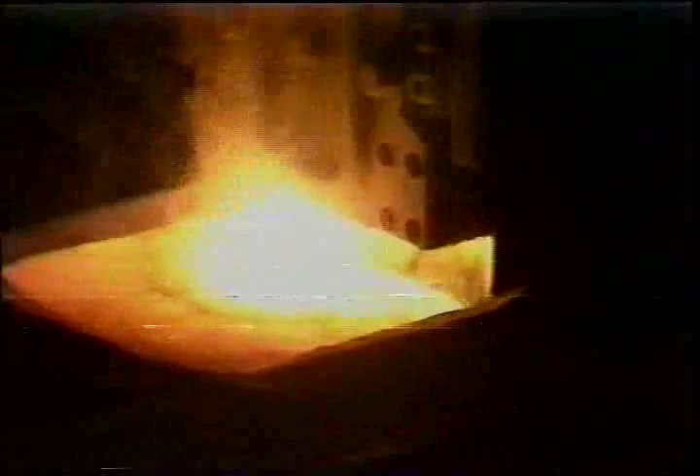High-temperature vessels, such as those used in nuclear power reactors or oil desulfurization towers, are usually lined with stainless steel, which excels in resistance against corrosion. And a new overlaying welding process has been developed. It is called the Maglay process.

It is a new overlaying welding process using a wide strip electrode and featured with adoption of electroslag welding and control of liquid slag and metal flow by electromagnetic force. The Maglay process promises higher quality welds and better productivity than the conventional arc welding method.

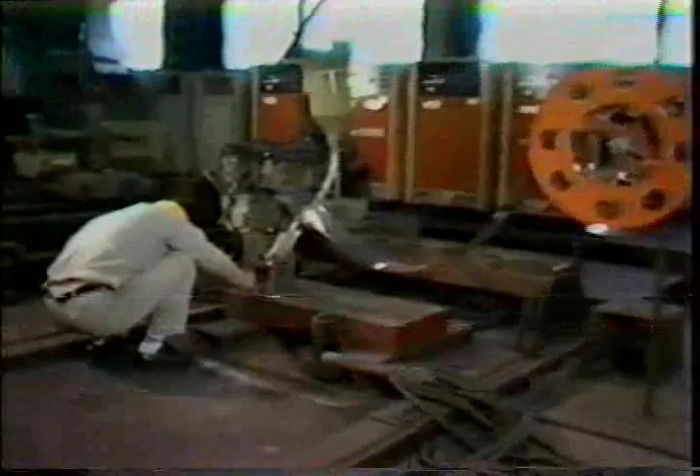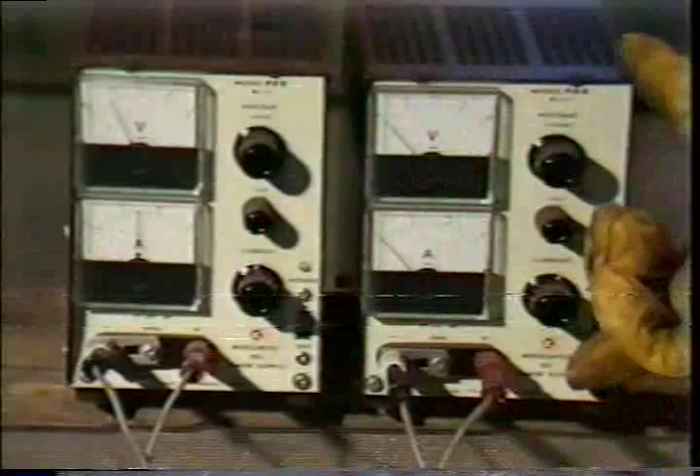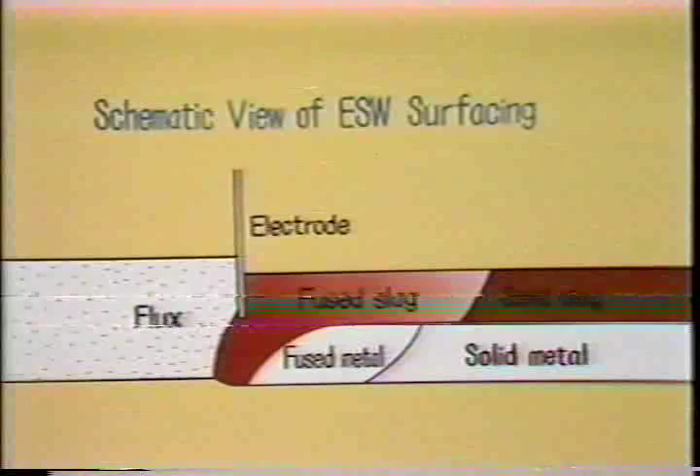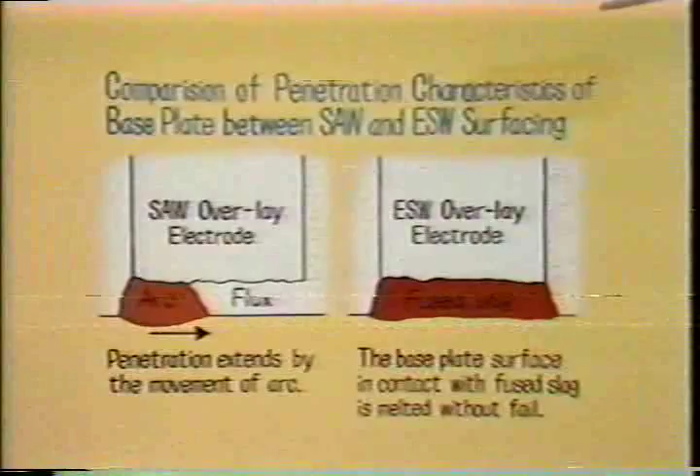How is the wide strip electrode overlaying welding done? Let us look into the details. As the figure shows, it utilizes heat of the molten slag generated by electric resistance. The ESW process shown on the right has better penetration characteristics of base plate than the conventional SAW, opening the way for use of 150 millimeters or wider electrodes without slag inclusions or lack of fusion.

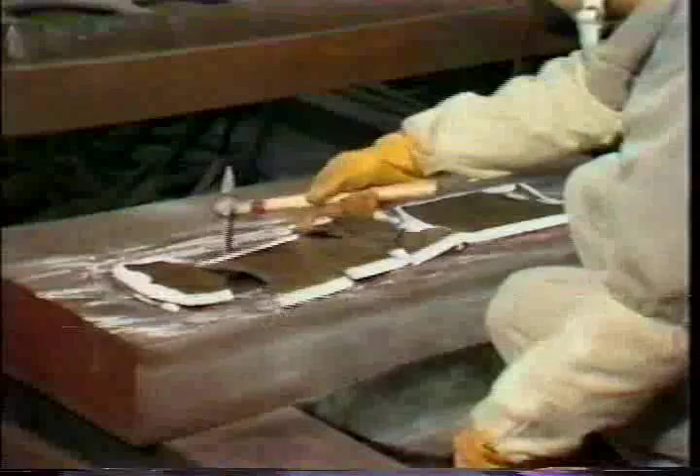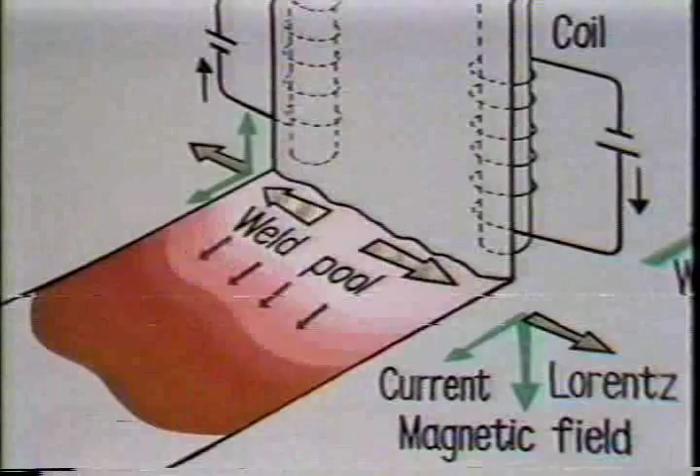What makes the Maglay process outstanding then? The epoch-making idea is the provision of electromagnetic coils on both frontal sides of the electrode, whose magnetic fields act on the welding current to prevent undercutting and flatten the weld bead.

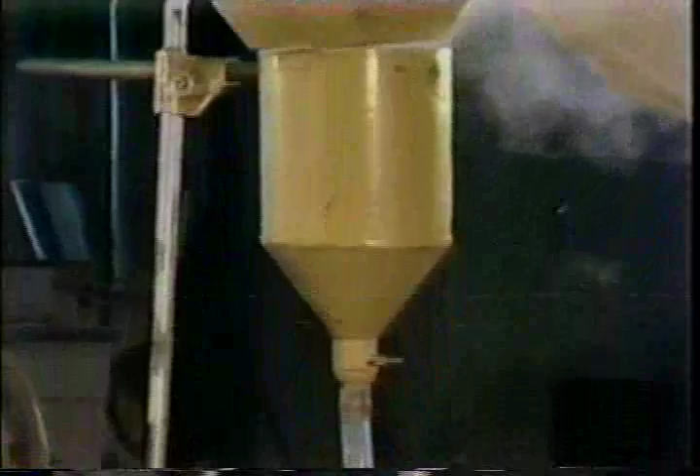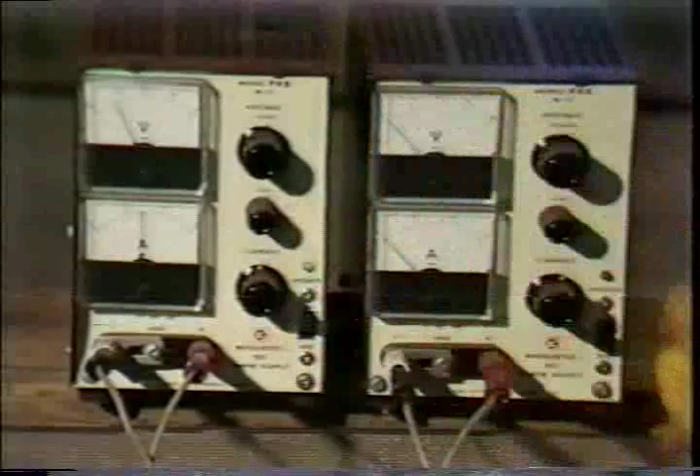Now let's see an actual application of the Maglay process. A conventional SAW strip electrode welder can be turned into the new system by a simple improvement on its contact jaw for attaching the lateral coils. Magnetic control is started by exciting the coils. The electrode now in use is 150 millimeters wide.

Watch the flow of the weld pool, and this is the secret of the excellent performance of the Maglay process. The flow of the weld pool is clearly seen from the surface pattern of the welding bead. Now, what will happen if the coil on the right is to remain idle? As you can see, molten slag flows anti-clockwise. The undercutting on the right side shows how effectively the magnetic control had been working.

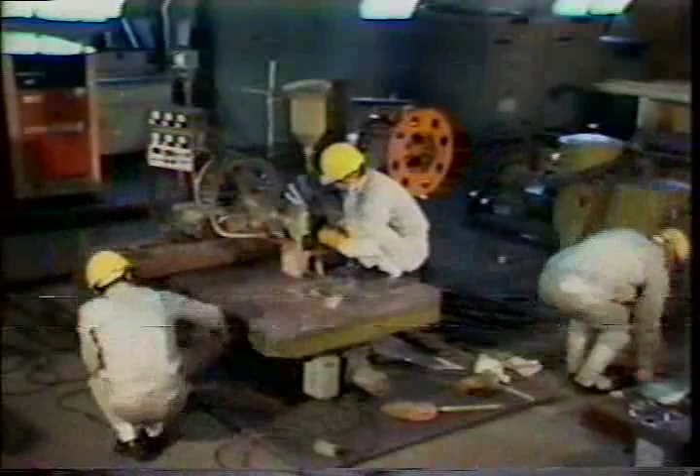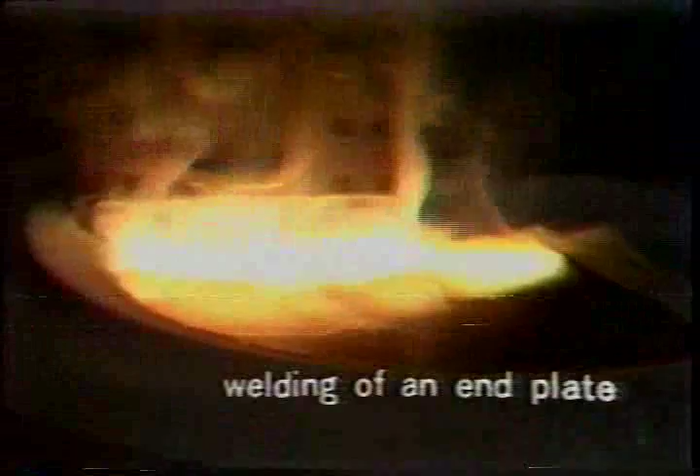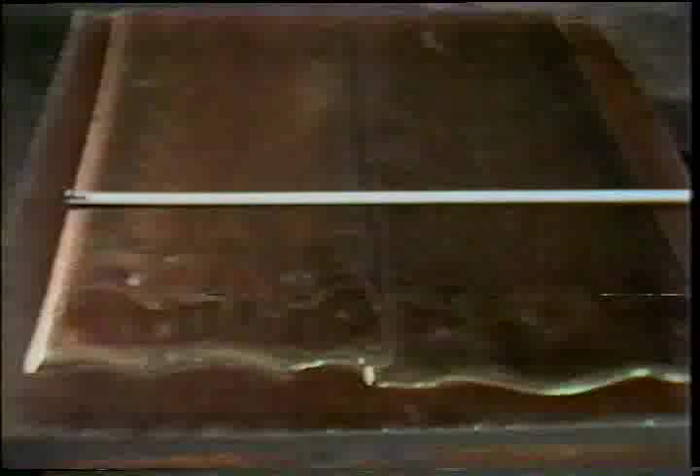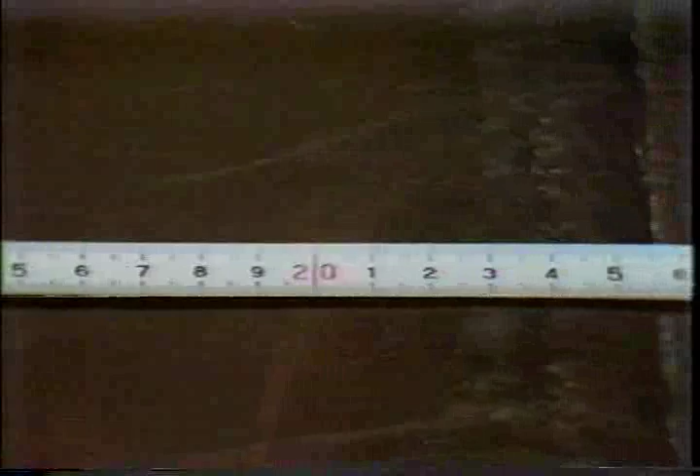Next, an end plate welding is demonstrated. In the meantime, let us take another look at the merits of the Maglay process. Welding efficiency has drastically been raised through application of wider electrodes, not only 150 millimeter wide ones, but even those as wide as 250 or 300 millimeters. Here are examples of electrodes ranging in width from 25 to 250 millimeters. The electrode thickness is 0.4 millimeter.

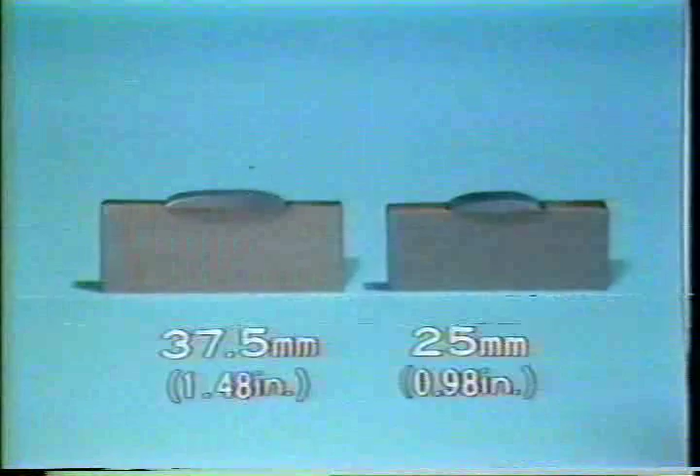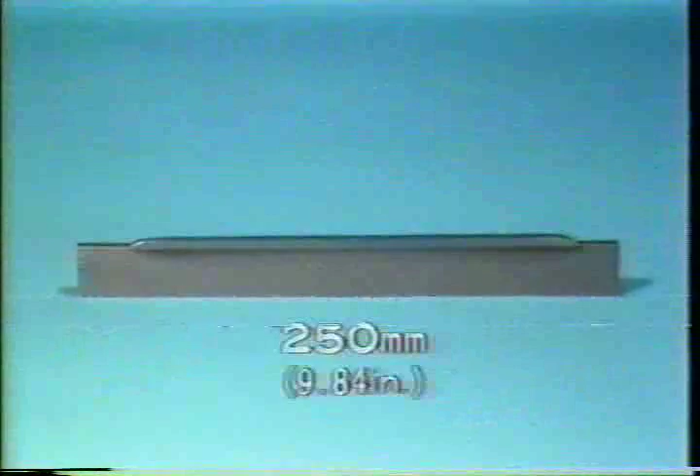The bead thickness can be adjusted between 3 and 6 millimeters, depending on the welding condition. Look at the beautiful overlapping area between two passes of 150 millimeter wide welding. Welding by the Maglay process has no slag inclusions or lack of fusion. Bead dilution by base metal is on a low level. That is, the weld is little affected by the base metal.

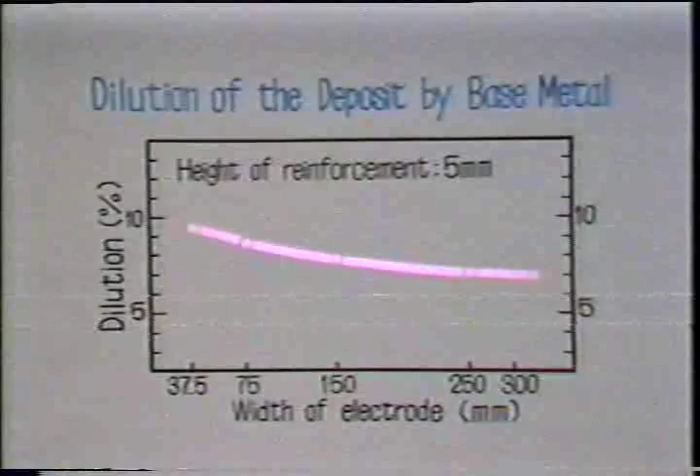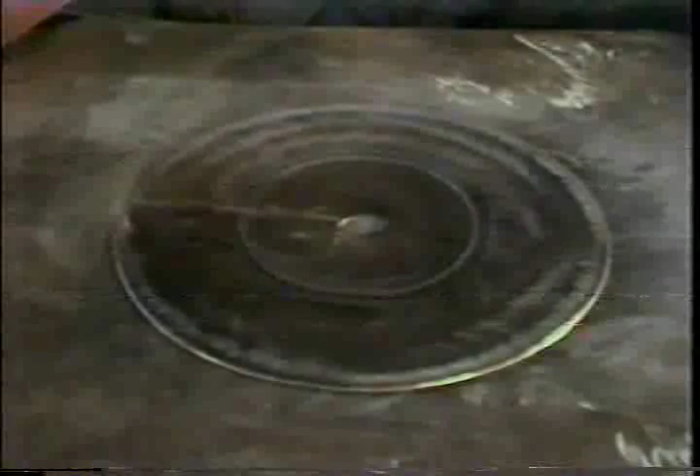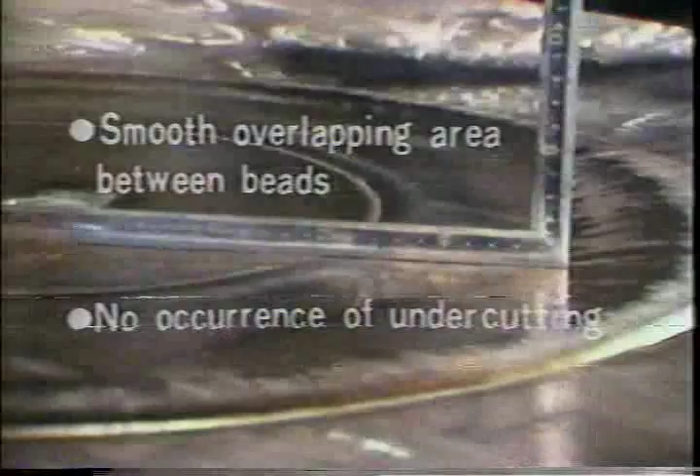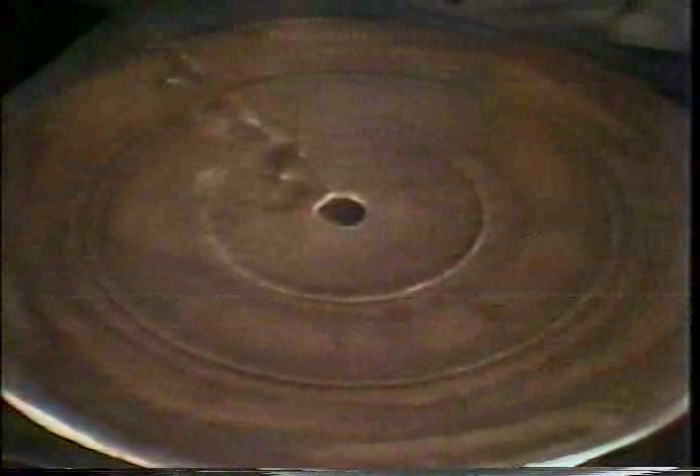The smooth overlapping area between the welding beads causes no undercutting. Hence, the Maglay process promises a drastic reduction in repair welding and economy of materials, time and labor. Also, the welding beads have superior anti-corrosiveness due to their low oxide contents. In this way, highly efficient and reliable welding has been made possible by the Maglay process.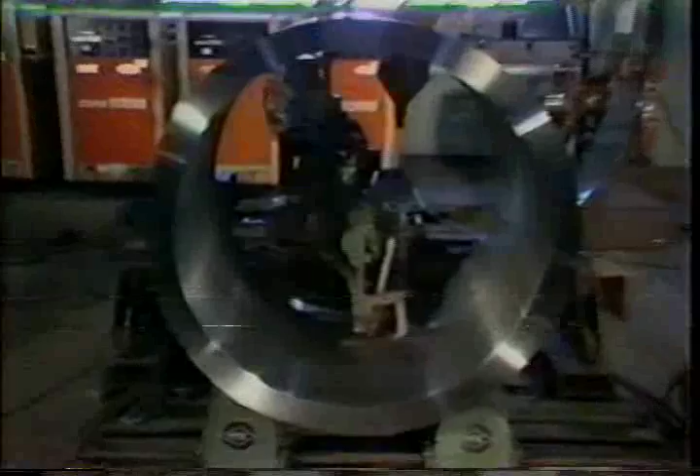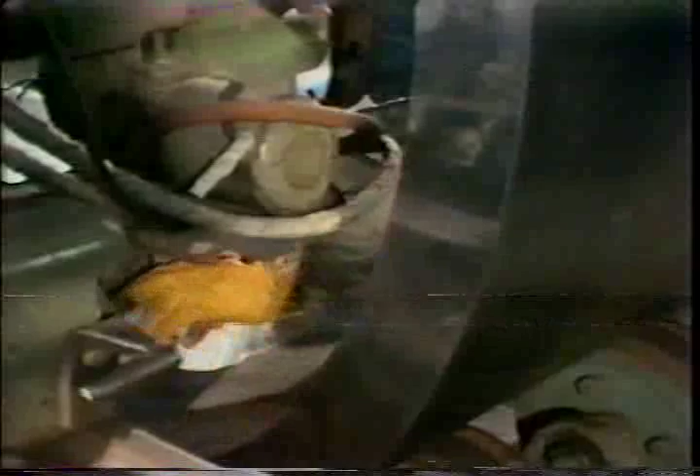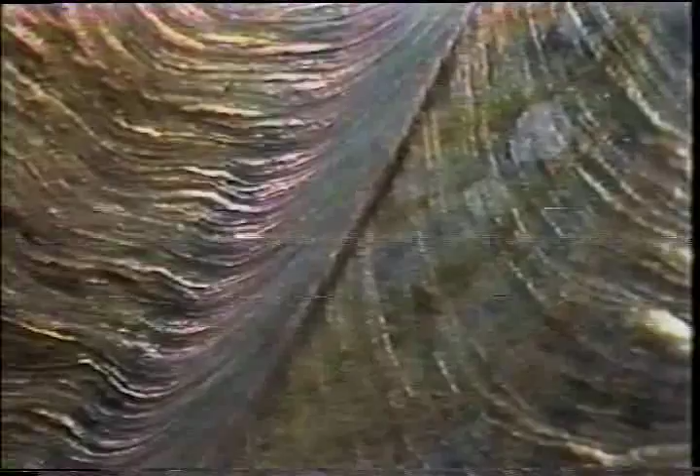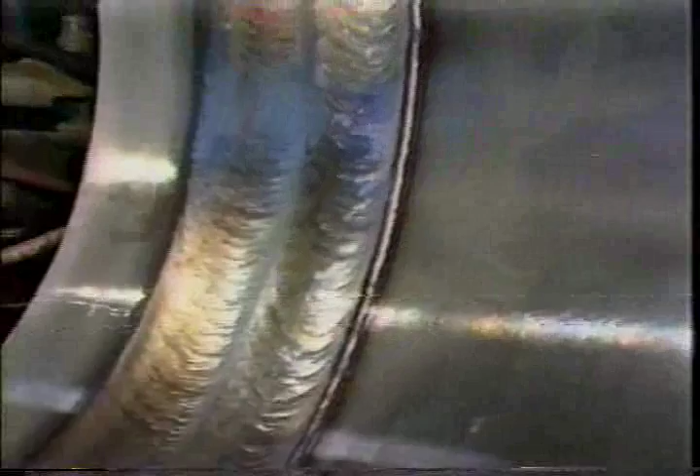Among the best applications of the Maglay process are manufacturing of pressure vessels for nuclear power reactors, oil refining reaction towers, heat exchangers, nozzles and flanges, and liners for water turbines. Numerous users are already enjoying the merits of the outstanding welding process. Here are the electrodes produced by Kawasaki Steel. Any kind of welding for reactor vessels can be welded by means of these electrodes and the flux.

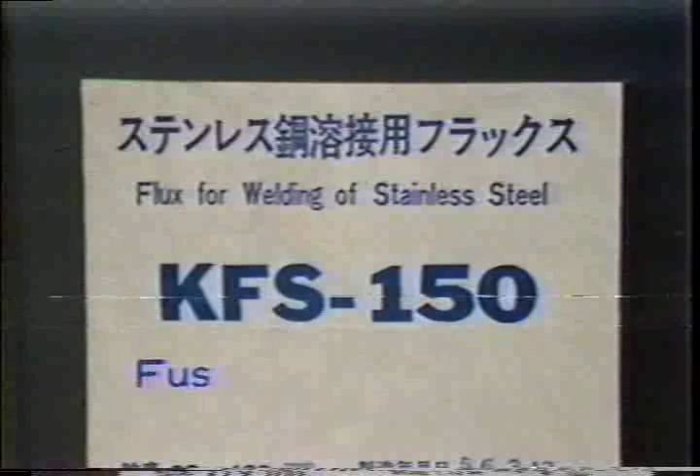The epochal wide electrode overlaying welding process Maglay has been developed by the technical staff of Kawasaki Steel Corporation. Kawasaki Steel presents the Maglay process with confidence as one of the newest techniques for the 1980s.